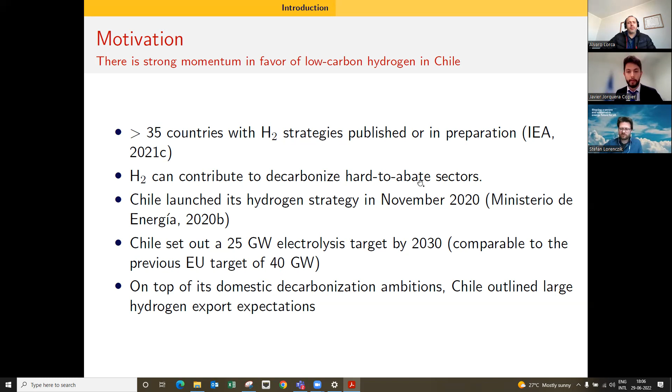On top of the domestic decarbonization ambitions that Chile has for hydrogen, the country outlined important export ambitions, which could lead to about 800,000 jobs by 2050 if the ambitions in the strategy are met. In fact, the Chilean government expects hydrogen to contribute about 21% of the emissions reductions towards Chile's carbon neutrality by 2050 goal. This is really a very important energy opportunity for Chile, both in economic development terms and decarbonization terms.

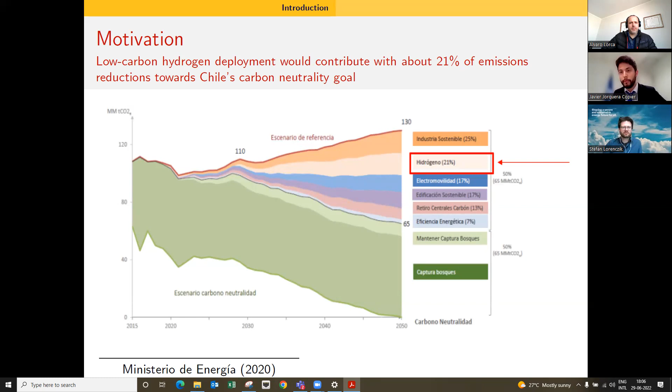So where does the potential for hydrogen come from? Hydrogen, if produced with electrolysis - the process to produce hydrogen with electricity and water - the electricity cost is about 50 to 90% of the cost of hydrogen. So if we have cheap electricity and also low carbon electricity, then we can have a very competitive low carbon hydrogen source. Chile, in fact, is a very good country for renewables.

For example, we have about over 1,200 gigawatts of solar PV potential. On top of that, we have over 500 gigawatts of CSP, concentrated solar power potential. And we also have about 40 gigawatts of wind potential. This is all excluding Patagonia. So we are talking about a very abundant and competitive renewable potential, which could enable the country to produce hydrogen in very large and low cost amounts.

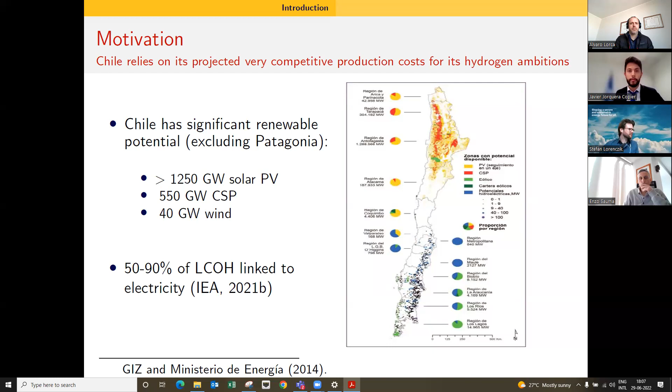Given this opportunity, we should find a way to plan for the ideal and minimal cost system possible to take advantage of this important opportunity for the country. In that context, for energy systems planning, usually optimization models are used, which basically minimize a certain objective - usually total costs - subject to a different set of conditions that the system has to comply with. These models are usually used to plan energy systems and also to do policy analysis on them.

We can also see that there are many benefits of integrating hydrogen and power networks. This is because electrolysis uses electricity and water to produce hydrogen, but at the same time, hydrogen can be used, for example, with a hydrogen turbine to produce electricity. So this two-way interaction can enable multiple benefits by integrating both systems, for example in terms of lowering costs, lowering emissions, and integrating more renewables.

We can also say that technology diversity is a challenge, because when coupling both these systems, there is a huge portfolio of technologies to choose from. For example, variable generation technologies such as solar photovoltaic and wind power, but also non-variable ones like gas plants, coal plants, and many others. We could also have transmission lines for electricity, hydrogen pipelines to transport hydrogen, hydrogen carrying trucks, storage, hydrogen-to-power technologies, and many others.

So this diversity calls for a very good model to plan for the best system. Lastly, we have some models that have been proposed that plan for integrated systems, which considers both hydrogen and power networks together. But usually they focus on designing for one target year, for example 2050 only, or they focus too much on one network but with less detail in the other.

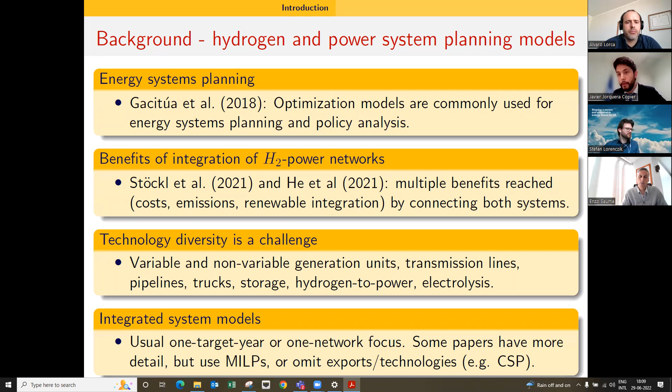And in some cases, in some papers that do have more detail in both and model the evolution of the system, they use a mixed integer approach, which sometimes is harder to solve, or they also omit exports or technologies that can be very important, such as solar thermal.

In the case of Chile, we also have some studies that have been published. For example, Gallardo, Hurtubia, Sauma, Armijo, and Philibert. They have published work that mostly focuses on hydrogen production, not on the network as a whole.

And there are some analyses, for example from Osorio Aravena, that have published integrated system analysis, but usually they have reduced geographical detail, meaning very few nodes, up to 6 for the whole country, which is not much. They also don't include hydrogen exports, which is very important for Chile, nor storage or transport, which could play an important role in their supply chains.

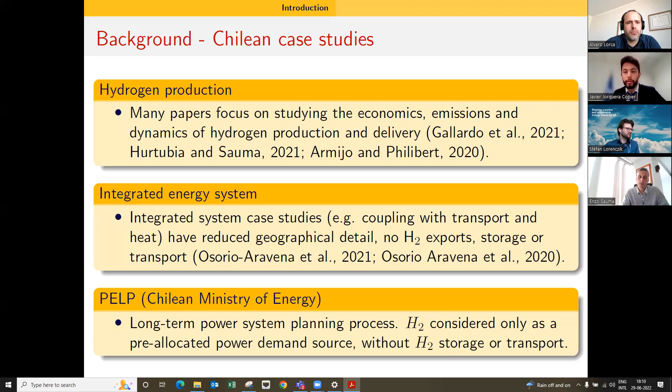And lastly, the Ministry of Energy of Chile has their own long-term power system planning process. But in their case, although they incorporate very good detail of the power system, hydrogen is only considered as a pre-allocated power demand source, meaning that they define beforehand, before running the model, where the hydrogen will be located, and it's not an outcome of the model. They also don't include hydrogen storage or transport modeling.

So based on that, we have three main contributions. One is methodological: we propose a new linear optimization model for integrated networks design, which is capable of allocating hydrogen and power production, hydrogen exports, representing energy transport and storage dynamics, and a very diverse portfolio of generation technologies, all done with operational and policy constraints.

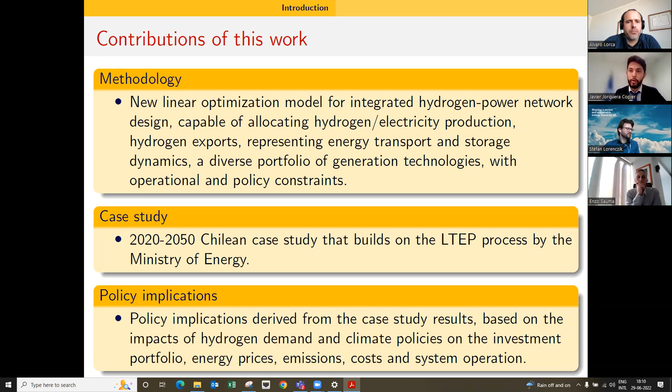We also carry out a case study from 2020 to 2050 for Chile that builds up and improves on the process of the Ministry of Energy. And based on those results, we discuss and draw some policy implications in several different aspects.

So what is, in a very short message, the main objective and what does this model do? This kind of model is called a capacity expansion planning model. The main question it answers is, what investments should we deploy and how should we operate them to meet energy demand at each node and each time throughout our studied time horizon, also respecting a series of operational and investment conditions, at the lowest system total cost possible.

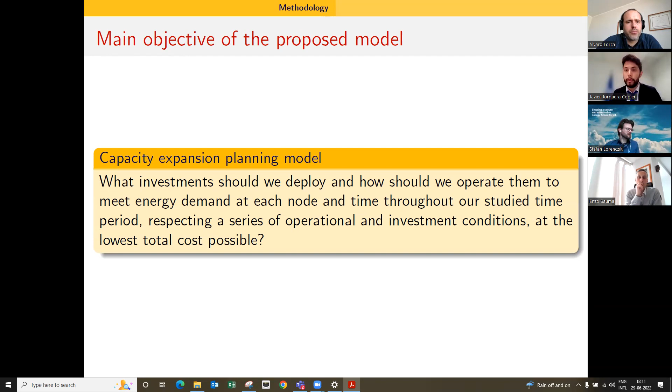So based on that, this capacity expansion planning model decides on several spatiotemporal decisions of investment and operation. For example, investment in infrastructure of generation, also transport and storage. They also decide how these assets will be operated in terms of energy production, energy flows from one node to the other, storage, and among many other variables. And the idea is to supply hydrogen and electricity demand at all times and in all locations, minimizing all costs involved.

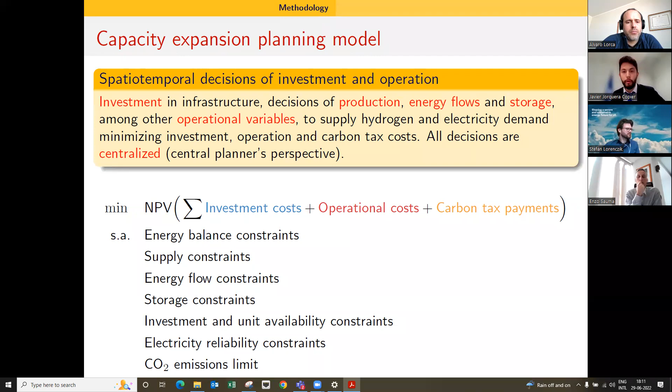So now, to give you a brief idea before I jump into the equations, I will just describe this brief scheme to illustrate how this network works. We have several nodes, and every node is composed of a hydrogen part and an electricity part. The hydrogen part, as well as the electricity part, can have their own demand of hydrogen or electricity, their own supply, generation, and also their storage, which can be loaded or unloaded towards the node.

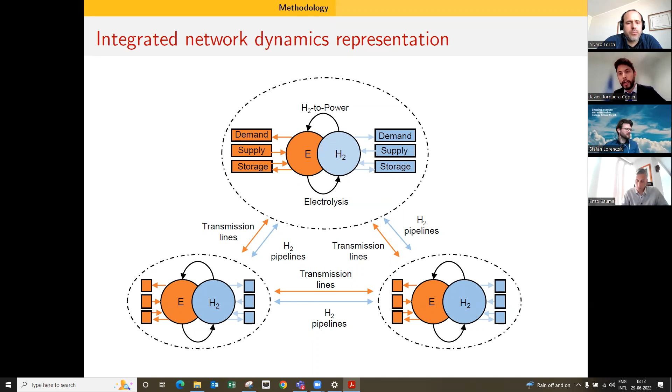And there is also this two-way connection between both nodes, because we can produce electricity with hydrogen using hydrogen-to-power technologies, but we can also produce hydrogen with electrolysis using electricity. So this interaction is what allows us to plan the system together. We can also then send some energy to other nodes, for example in the case of hydrogen, via hydrogen pipelines, which in Spanish are called tuberías, which can be used to pass hydrogen from one node to the other. And we also have some transmission lines for power. Now, very briefly, I will discuss the mathematical formulation of this model.

So at first, we have an objective function that is the total costs that we seek to minimize, based on the fact that investments are modeled throughout years, and we also model the operation of the system using several days inside every year.

So for this case, we model some target years, which means that we don't model the full horizon from 2020 to 2050. We model 2020, 30, 40, and 50, and then we interpolate all the variables in between with a simple linear interpolation.

Then also within those years, we don't represent every hour of the year. What we do is take some representative days, as they are called, to model just a small sample of typical days that represent the operational dynamics that can be seen by the system in a certain year.

So with those two dynamics, we model the costs throughout the whole horizon, both considering the investment costs throughout different years, but also the operational costs within each modeled year.

We also have some energy balance and transport constraints. Basically, what these constraints do is ensure that everything that goes into a node is the same as everything that goes out, respecting the physical constraints of the system.

We have that for hydrogen and also for power. For both, we have inflows that come from lines or pipelines, generation or production in the case of hydrogen, storage unloading and loading, and also demand. So it's a very complicated system that includes many aspects in both types of energy vectors.

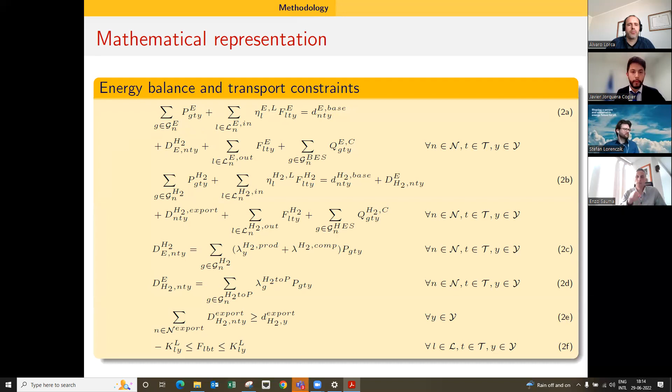We also have some generation constraints that model, for example, if solar photovoltaic or wind turbines can vary their output because of less sunlight or less wind. So this captures the intradaily patterns of variable generation units like those.

This also models the technologies and output of some technologies such as gas plants or coal plants that don't have these temporal variation details, and only depend on their installed capacity to see how much they can generate. And particularly for CSP, concentrated solar power, we have a specific set of constraints because this technology is a bit more complex than others.

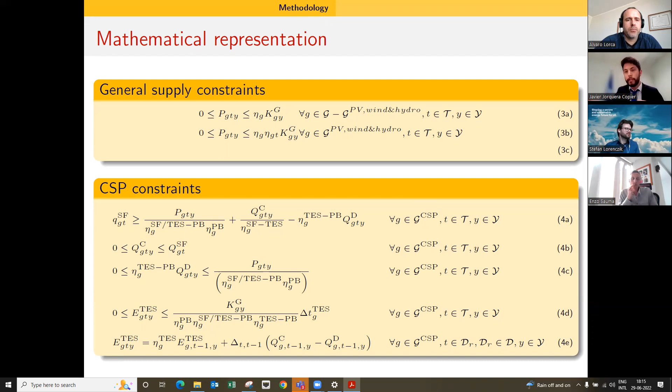This technology basically captures sunlight, thermal energy from the sunlight, and can either store it in a thermal way, and then release that energy in the form of electricity later. So this technology is a bit particular—we could say it's like an improved solar panel, because it can also store some of that energy to then release it later to the system in the form of electricity.

We also have some storage constraints. These ensure that, for example, the capacity of storage that I have at every moment depends on what I invested in before. And we also have the inventories, which basically say that the amount of energy I have stored now depends on how much I had in the moment before, and the net discharge I did in that moment before, to see how much I have in this certain moment.

Here, we model intradaily, hour to hour storage decisions, but we also consider a seasonal approach for hydrogen, because hydrogen is a good opportunity to be stored seasonally, from month to month, not only within the same day. So this only represents the dynamics for that kind of storage.

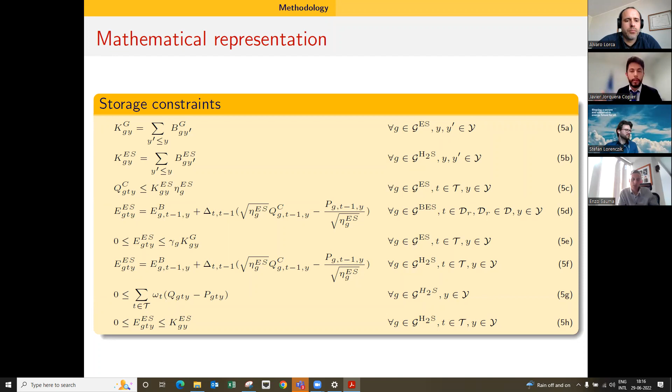We also have some investment and availability constraints. This basically says that, for example, the amount of generation capacity I have in a certain year has to be equal to the sum of the investments I did in the years before until that year.

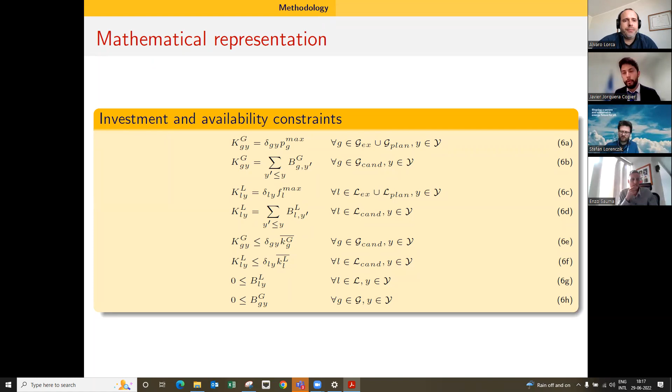We also model here that some technologies are already planned and committed to enter the system in a certain year. And also, for example, some plants such as coal power plants, which will be phased out, will exit the system in a certain year. So this tries to incorporate all of those dynamics, and this holds both for generation, storage, and also for transport technologies.

We also have some electricity reliability constraints. This basically ensures that enough reserves and backup capacity for the system is always present.

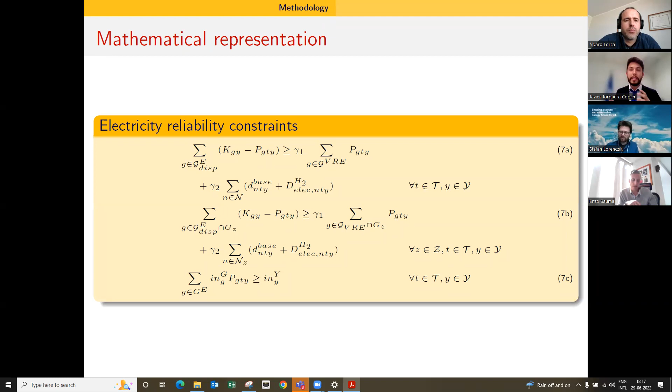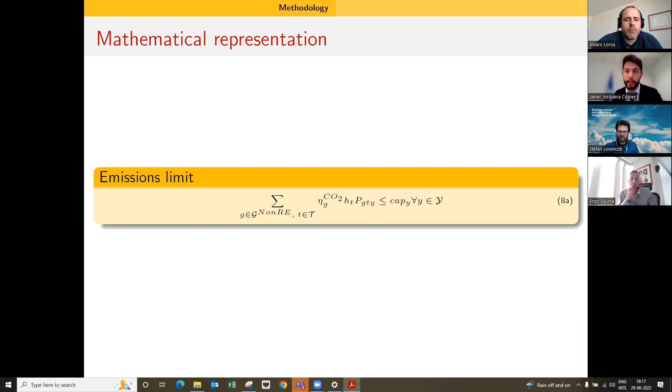We also have an inertia requirement that ensures enough inertia for the system is always present, which is a simple approximation for a stability kind of constraint applied to the model. Finally, we have an emissions limit, which lets us control how much emissions we allow the system to have, so we can force the system to be zero emissions by a certain year, which is interesting to analyze from a policy perspective.

With that model, we conducted a case study that goes from 2020 to 2050, with 4 target years starting from 2020, every 10 years. We have 26 nodes and 28 transport corridors, over 1,000 power plants, and 12 representative days, which are used to model the operation of a whole year without having to model every hour, since that could be too computationally demanding.

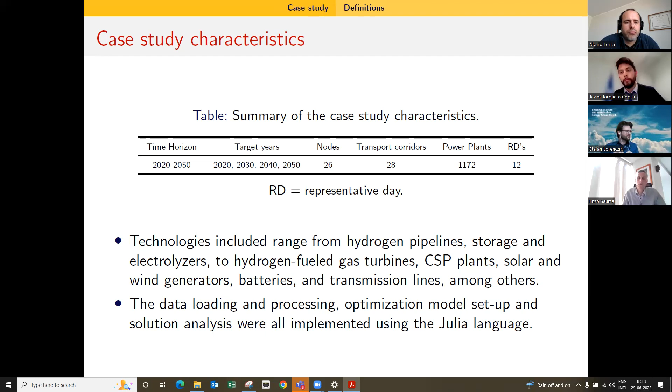In this case study, we have technologies from a wide portfolio, for example hydrogen pipelines, storage, electrolyzers to produce hydrogen, hydrogen-fueled gas turbines, and many others. This model was implemented completely in the Julia language.

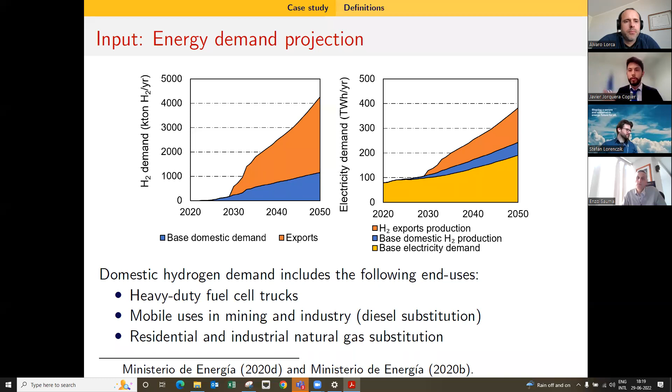To the right, we see the base power demand the system would see without hydrogen, then we can add the electricity demand required to meet additional hydrogen demand, for example for domestic uses like heavy-duty fuel cell trucks, mobile uses in mining and industry, and residential and industrial uses. On top of that, we could see hydrogen demand for exports, which could go into the international market.

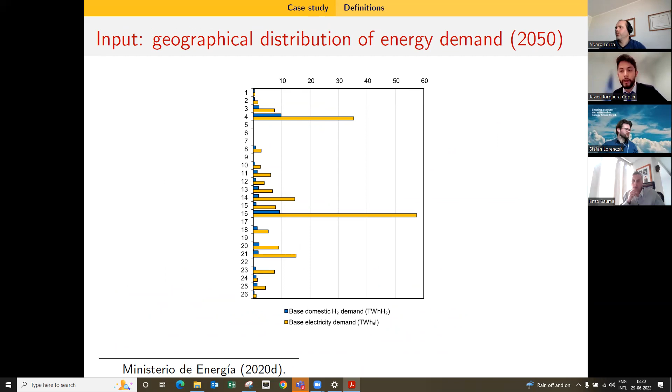This chart shows that both energy for electricity and for hydrogen could be quite concentrated. In fact, the metropolitan region and the Antofagasta region could be very important hubs because of their industrial and mining activities in the case of Antofagasta. So they could demand a high share of power and hydrogen.

We also defined some scenarios to compare. The baseline case is B, where we assume the carbon tax is fixed at its present level, $5 per ton of CO2. In that baseline scenario, we don't have any fully renewable system mandate, meaning the system has no obligation to be fully renewable—if it's not economical, it won't do it. Also, the baseline scenario doesn't have any hydrogen exports. That is what constitutes the B scenario, the baseline.

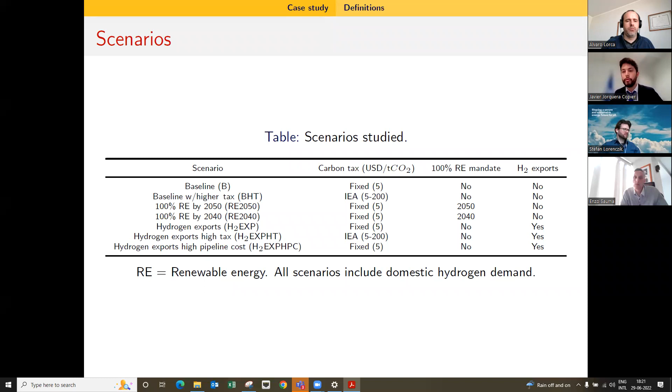On top of that, we modify some variables. For example, we add a higher carbon tax in some scenarios. In some scenarios, we also include a fully renewable mandate for the system, for example by 2050 or 2040. We also include exports in some scenarios, to see what variations these aspects can produce in the system and in several result variables.

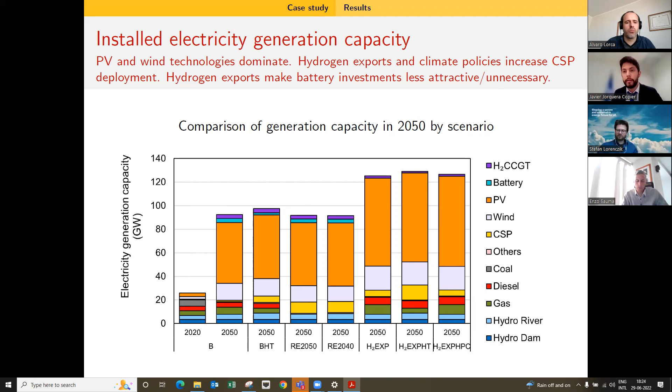Finally, you can also see that in the hydrogen export scenarios, battery investments are less attractive, or even unnecessary. This is because hydrogen exports require more electricity to be produced, and because hydrogen is usually produced in daylight hours, there is no surplus electricity that is usually linked to solar PV technologies. In other cases, there are some batteries because we had some surplus electricity stored in batteries and released again to the system, for example at night. But in these cases, because of the higher hydrogen demand, it's a better idea from the model's perspective to use that extra electricity to produce hydrogen instead of storing it in batteries. So we see almost no batteries in those scenarios, because that extra electricity in sunlight hours is better used to produce hydrogen instead of being stored in a battery.

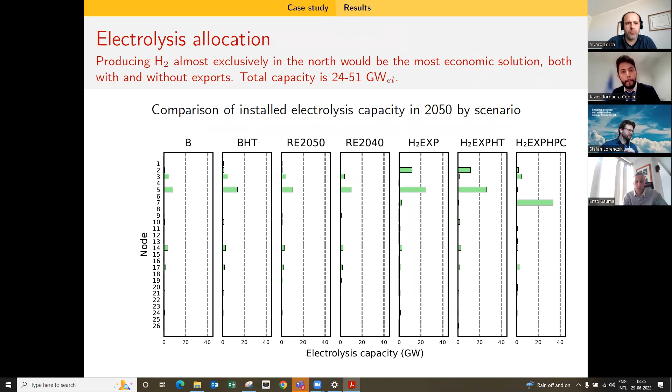Also, regarding transmission line capacity, we can see that the model says we would have a very important increase of this capacity. For example, in the baseline case, we would see lines, or more specifically transport corridors, which can be aggregated lines, having over 20 gigawatts of power transmission capacity per corridor. And that capacity in the hydrogen export scenarios could grow even almost to 60 gigawatts. So this is a very important result.

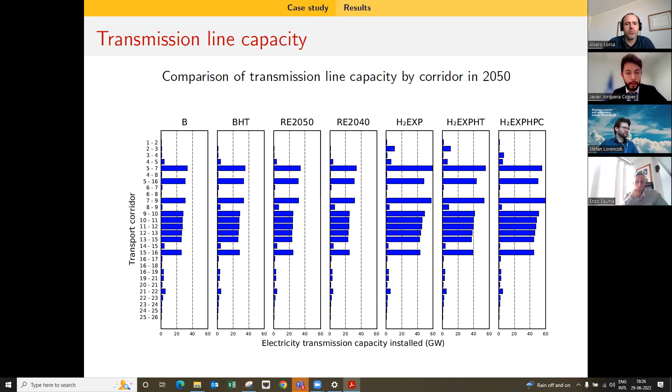Also comparing to hydrogen pipelines, because hydrogen pipelines usually don't surpass 10 gigawatts in our results. So we can see that as we would have transmission line capacities of over 40 in some cases, or even up to 60 gigawatts, the preferred way, not always but in many cases, by the model will be to transfer energy via power transmission lines, and pipelines for hydrogen transport would be left for some very specific corridors in the case of the system that we are simulating for 2050.

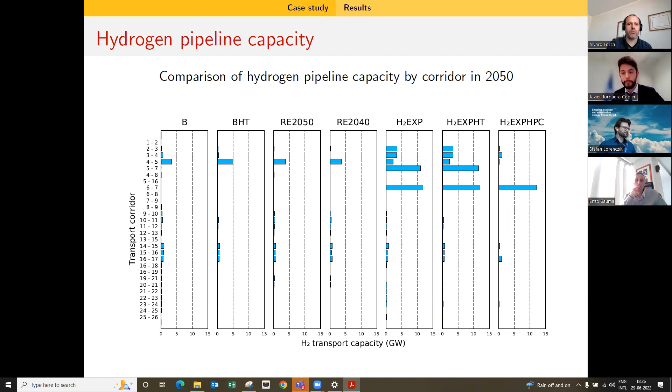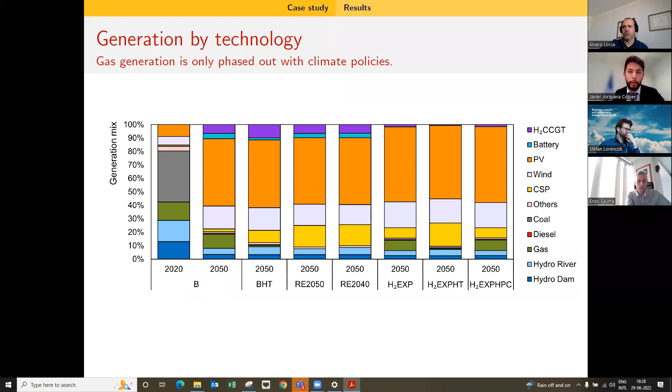Also now, continuing on the connection between solar PV generation and electrolysis, which is the technology to produce hydrogen using electricity and water, we can see that electrolysis can benefit and can be flexible because we also have hydrogen storage. So having both technologies together means...

I can basically decide when in the day it's more economic to produce hydrogen because I have the ability to store it. So I can, for example, produce a lot in the day, then store it, and then supply it to my consumer when the consumer demands for it.

So this is a big advantage of having storage, because otherwise the electrolysis could be forced to produce exactly when it is demanded to produce hydrogen. But in this case, because we have storage coupled with electrolysis, the model can decide when to produce electrolysis, when it's cheaper, and then release that hydrogen to the node when the node demands for hydrogen.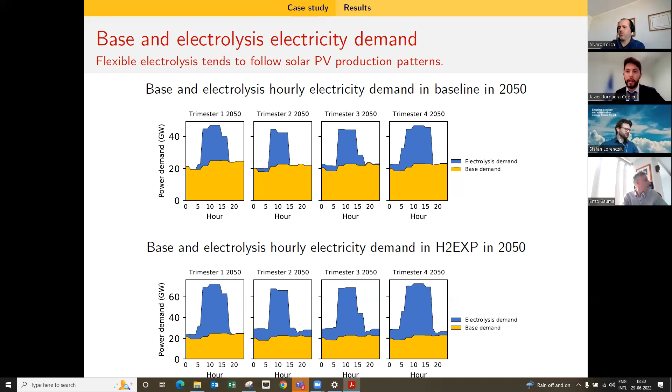Now, regarding system costs, we can see that both climate policies and also higher hydrogen demand via exports increase system costs, because they demand either more investments or at least a higher operation of the system. So climate policies increase the system cost by up to 13.5%, and the exports by up to 53% in this case.

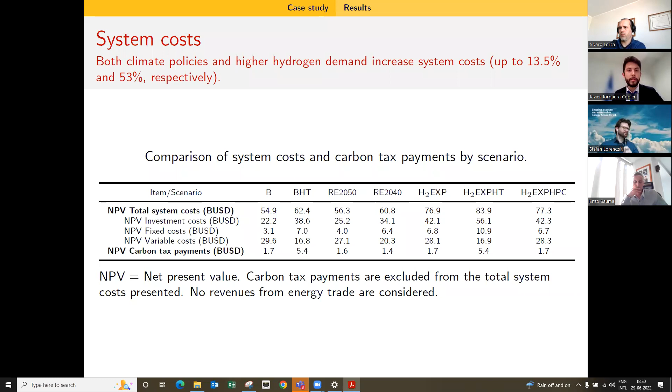We also see that the system emissions have several aspects to analyze. For example, hydrogen exports on one hand decrease the average electricity emissions intensity, which is basically a measure of the total emissions of the system divided by total generation, a measure of how much carbon content there is in every energy unit generated.

We can see that because that additional electricity to meet the additional exports of hydrogen demand is met via solar PV mostly, it decreases the average emissions of the system, which is why we say that the exports decrease the average electricity emissions intensity.

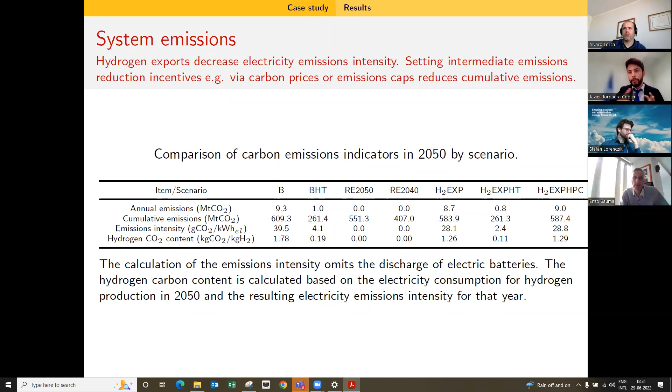We also see that setting intermediate emissions reduction incentives, for example carbon prices or emissions limits, incentivize or force reduction of emissions in the path to 2050, and in both cases they reduce cumulative emissions by up to 55%, which is the total emissions in the whole horizon, not only a specific year in particular.

Now, before concluding, I will discuss a bit on electricity prices. In this case, we can separate the analysis on end users, the typical end users of electricity, and also the price that electrolyzers would perceive because of being supplied with electricity.

In both cases, we see that climate policies would not significantly impact the prices in 2050. For example, the variations in end users and also electrolyzers are minimal, less than $2 or $3 per megawatt hour, which is a unit of electricity, of energy.

But in the case of hydrogen exports, which could mean that demand of electricity increases by almost 60% because of that additional demand, hydrogen exports cost almost doesn't change or even decreases a bit the typical consumers' electricity prices, because that increase in system costs is met in the electrolyzers prices.

So let me explain this. Electrolyzers can be flexible, so because of storage, they can decide at what hour of the day it's more convenient to operate. For sure, because they depend a lot on energy prices, electrolyzers seek for the lowest cost hours, which usually are in the day.

As they can be flexible, they can move towards the cheapest hours, and therefore, when they begin saturating those hours, they themselves feel the effect of increasing costs, and therefore they don't affect the end users because the end users are not changing their behavior.

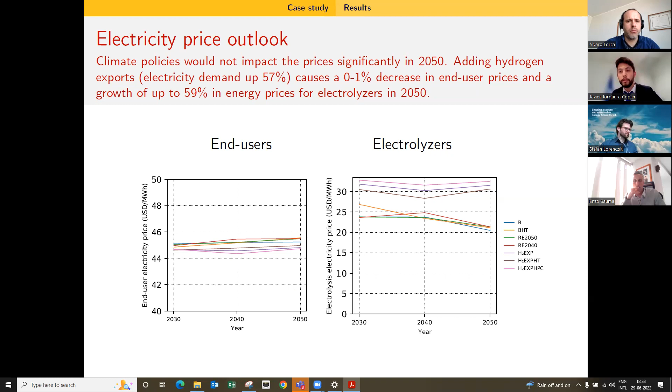So this is saying that it's very important to take into account that if electricity prices increase, then electrolyzers will probably have a higher price, which would be reflected in their hydrogen production costs.

So now to finalize and summarize my research: at first, we can show that we carried out a 2020 to 2050 Chilean case study, incorporating different levels of hydrogen demand and also climate policy scenarios.

We conducted this analysis by using a new linear capacity expansion planning model for integrated hydrogen power networks that incorporates exports, energy production, transport and storage, reliability constraints, also seasonal hydrogen storage, as I discussed, and they also incorporate many other operational and policy aspects.

By 2050, as our first result that I want to discuss, our baseline scenario, which doesn't have any hydrogen exports, doesn't have any additional fully renewable mandate or carbon tax, suggests that the system would be reducing emissions by 2/3 by 2050 compared to 2020 without any additional measure.